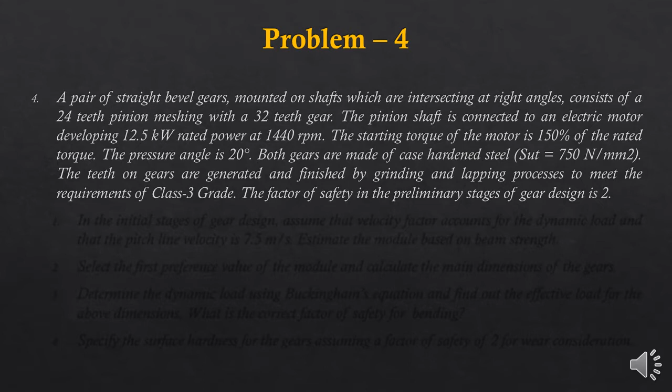In the initial stages of gear design, assume that the velocity factor accounts for the dynamic load and the pitch line velocity is 7.5 meters per second.

Estimate the module based on beam strength. Select the first preference value of the module and calculate the main dimensions of the gears. Determine the dynamic load using Buckingham's equation and find out the effective load for the above dimensions. What is the correct factor of safety for bending? Specify the surface hardness for the gears, assuming a factor of safety of 2 for wear consideration.

Alright, so this is the problem that we have now. If you note here, we had solved a similar problem for spur gears. More or less the same parameters were given, and they had asked us to design for the spur gear. This is similar, but here they have asked us to design a bevel gear. The application remains more or less the same.

Important point to note in the problem statement is the shafts are mounted at right angles, therefore theta is equal to 90 degrees. So most probably we'll be using a miter gear for this application. The gear teeth are known to us. Service factor is given as 1.5. Since we know ultimate strength, we can find out allowable static stress as ultimate strength divided by 3.

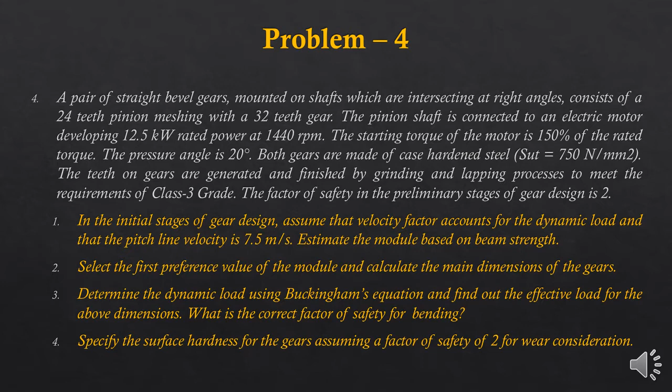Alright, so let's list the data and then get into the solution in the next slide. The data that we have is these, and we need to find module, gear dimensions, dynamic load, effective load, actual factor of safety, and Brinell hardness numbers.

All right, so in the slide I've already calculated the allowable static stress, ultimate tensile strength divided by 3, which is 250 Newton per millimeter square. So this has been done already. So let's look into the solution in the next slide.

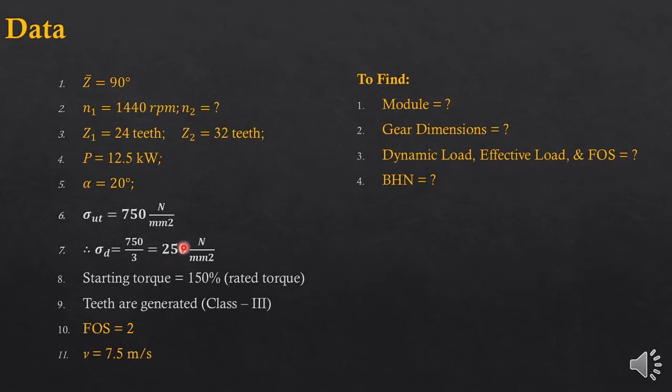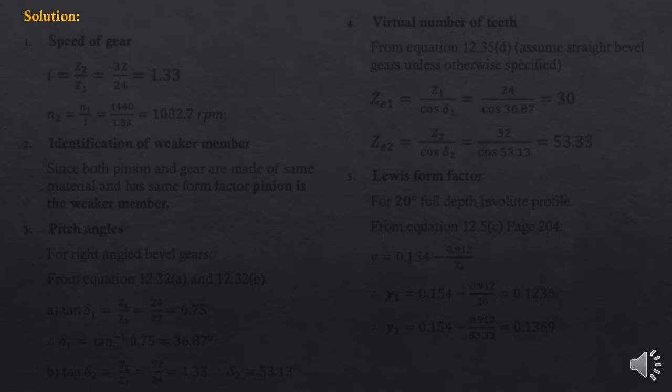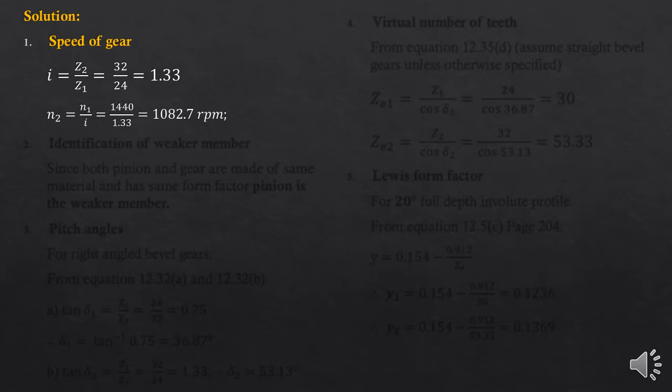Okay, so solution as usual begins with gear ratio to determine the unknown factors. We know both the number of teeth on pinion and gear, therefore we can calculate gear ratio as 1.33. Speed of the pinion is known, therefore we can calculate speed of the gear and we get it as 1082.7 RPM. Since both pinion and gear are made of the same material, we can tell that pinion is the weaker member, therefore design calculations are based on pinion.

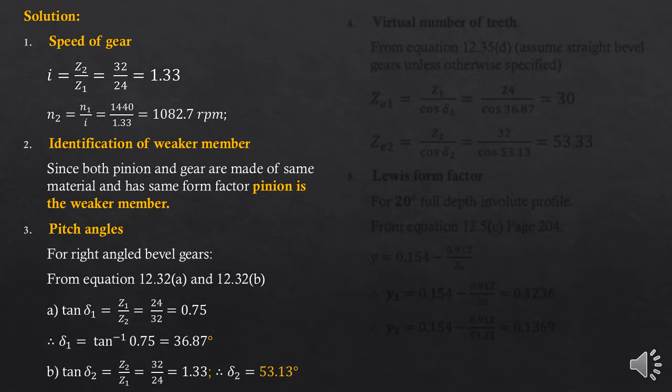Now for bevel gears, we will have to immediately calculate the pitch angles delta 1 and delta 2. Since the angle between shafts is 90 degrees, we take right angled bevel gears and calculate delta 1 as 36.87 and delta 2 as 53.13.

So pitch angles are obtained, and then we will calculate the formative number of teeth or virtual number of teeth using equation 12.35d, and we get the equivalent number of teeth as 30 for pinion, 53.33 for the gear. Now knowing these virtual number of teeth, we can calculate the Lewis form factor using equation 12.5c, and we get the Lewis form factors as 0.1236 and 0.1369.

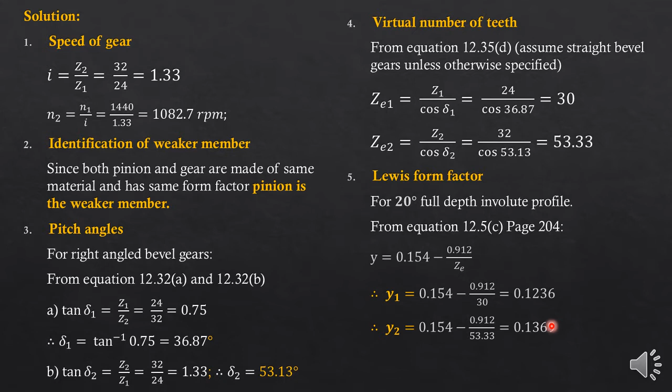Since we are designing for a pinion, we will be interested in y1, which is equal to 0.1236. This is the Lewis form factor. You'll have to multiply this by pi to obtain the form factor. Now we need to calculate module. Before that we will have to calculate the tangential tooth load, which we will see in the next slide.

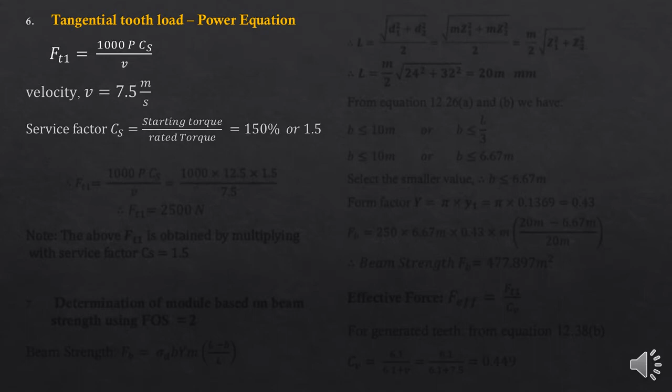Okay, let's calculate the tangential tooth load. Initially we will apply the power equation. The pitch line velocity is given as 7.5 meters per second, and the service factor is given as 150% of rated torque, which is equal to 1.5. Substitute it into the FT1 power equation and solve for tangential tooth load, and we get it as 2500 Newton. Take into account the fact that you have already multiplied it with 1.5.

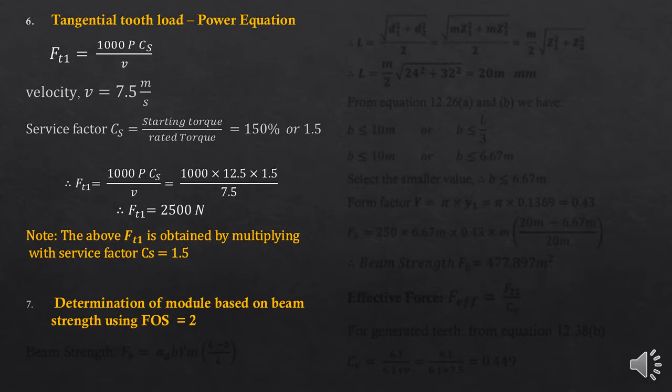But in this problem, if you read the problem statement, it is mentioned that we should calculate module using beam strength, and they have given us an initial factor of safety. Therefore the approach to calculate module is specified in the problem itself. We need to design or calculate module using beam strength value, using an initial factor of safety of 2. So let's do that now.

Beam strength can be obtained from the Lewis equation by taking out CV. Cone length you can calculate as d1 square plus d2 square by 2. Since we don't know d1 and d2, we can express it in terms of module, and we get cone length as 20 module.

Now if you look at the beam strength, we also need to know the face width b. From equation 12.26 a and b, we know that face width can be either 10 module or L by 3 module. Among these two we pick the smaller value. In this case, L by 3, that is 6.67 module, is smaller. Therefore we stick to face width equal to 6.67 module.

Now the form factor: you calculate pi into the Lewis form factor for the pinion, and we get it as 0.43. Now we know all the factors, substitute into the beam strength formula, and you get beam strength as 477.897 module square. So this is the beam strength formula here.

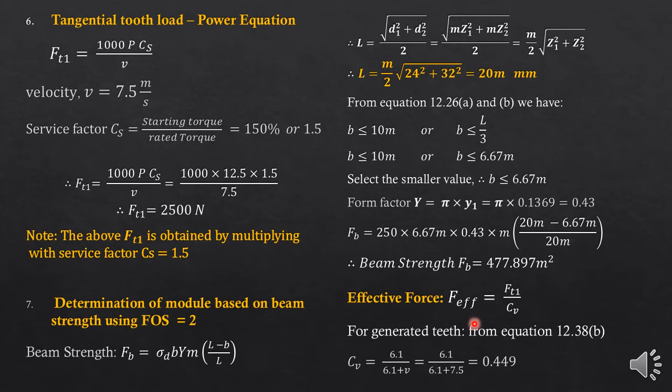Okay, so effective force can now be calculated. You know tangential tooth load as 2500, velocity factor is 0.449. You divide and you will get effective force. Once you know effective force, you can substitute this into the factor of safety formula, which we will see in the next slide.

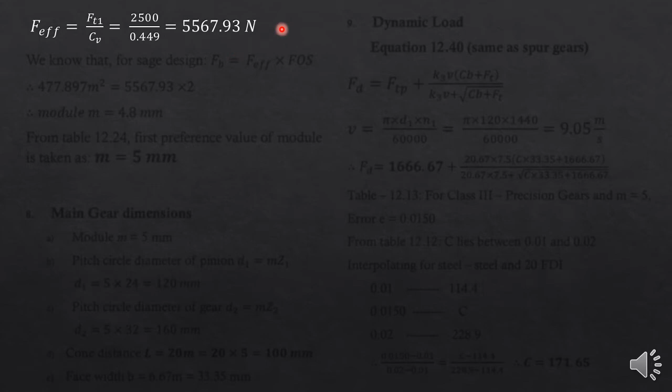So we know that effective load is tangential tooth load by CV. Therefore effective load turns out to be 5567.93 Newton. Now they have asked you to calculate module based on beam strength.

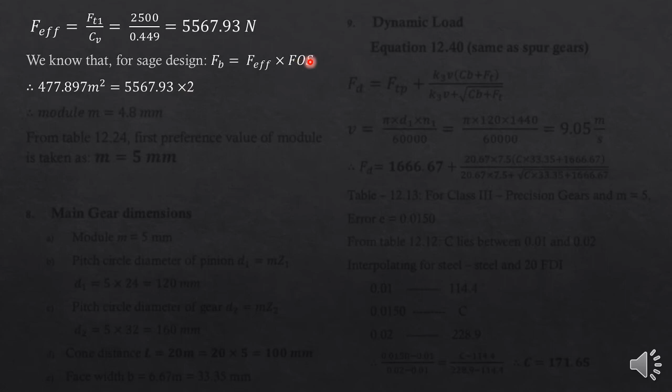For safe design we know that beam strength should be equal to effective force into factor of safety. Factor of safety is given as 2. Therefore you substitute: beam strength we have calculated as 477.897 module square, this is equal to effective force we have calculated as 5567.93, into factor of safety given in the problem as 2. Now this equation can be solved for module.

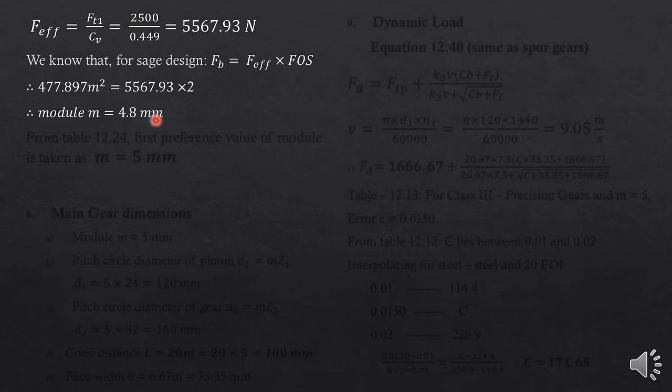Solving for module, you will get 4.8 mm. Now in the problem they have asked us to choose the first preference value, which is given in table 12.24, specific to bevel gears. You substitute that and from the table you will see that the closest first preference value is 5 mm. Therefore in this problem the module should be considered as 5 mm.

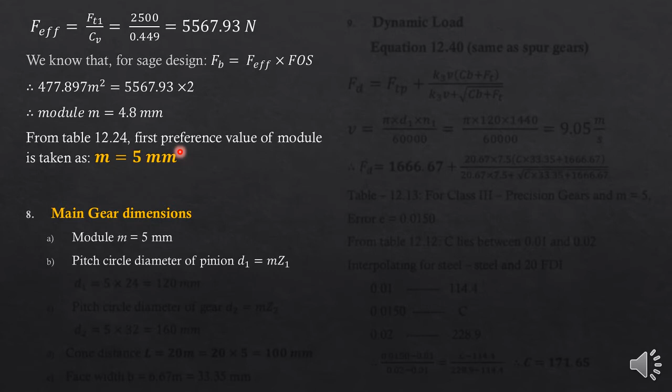Now the next thing they have asked us to determine is the main gear dimensions. Now that we know module is equal to 5 mm, you can calculate the pitch circle diameter of the pinion, since you know the number of teeth in the pinion as 24. You will get D1 as 120. Similarly, pitch circle diameter of the gear can be calculated as M times Z2, and it turns out to be 160 mm.

Cone distance, which we had calculated as 20 module, will now get an actual value of 100 mm. Face width, which was 6.67 module, will become 33.35 mm. So for the main gear, dimensions have been obtained.

Now what else have they asked us to find? They have asked us to calculate the dynamic load, then the effective load, and then determine the actual factor of safety. Let's begin with the dynamic load.

We know that for bevel gears, the dynamic load equation is the same as that of spur gears. But the velocity, which was initially taken as 7.5, will have to be refined now, because velocity is pi d n by 60, and the diameter value we just obtained as 120. Therefore a more accurate value of pitch line velocity can be calculated using D1 as 120, and you get linear velocity as 9.05 meters per second.

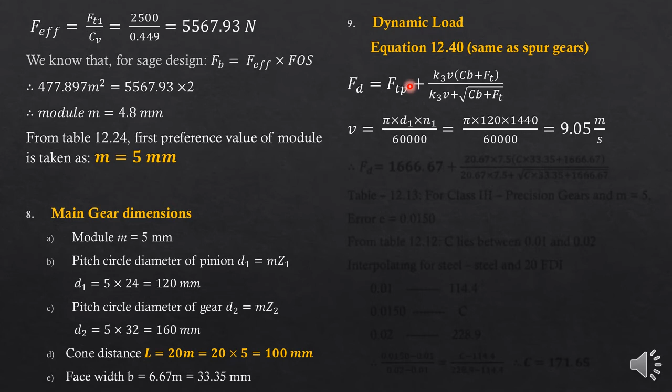Now for dynamic load, I will divide 2500 by the service factor CS, which is equal to 1.5. When I divide 2500 by 1.5, I get 1666.67. That is the value I will substitute here.

The only unknown now in the dynamic load equation is the dynamic factor C. You need to calculate this from table 12.13. From 12.13 you get the gear error for class 3 and module 5, which is 0.0150. From table 12.12, you see the required dynamic factor lies between 0.01 and 0.02. Interpolate it and get the dynamic factor as 171.65.

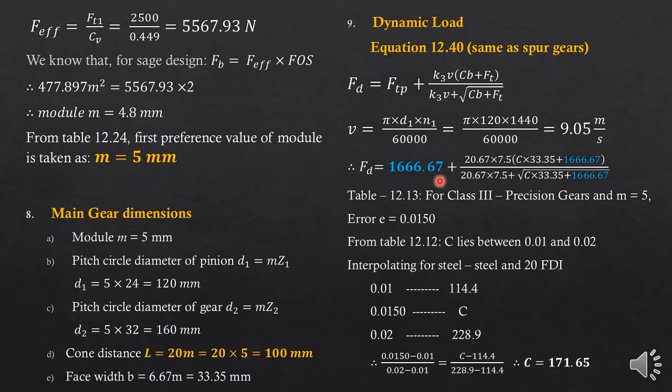Substitute C in the dynamic load formula and you will get the dynamic load, which we'll see in the next slide. Substituting all the factors, you get the dynamic load now as 6421.22 Newton. So dynamic load is obtained.

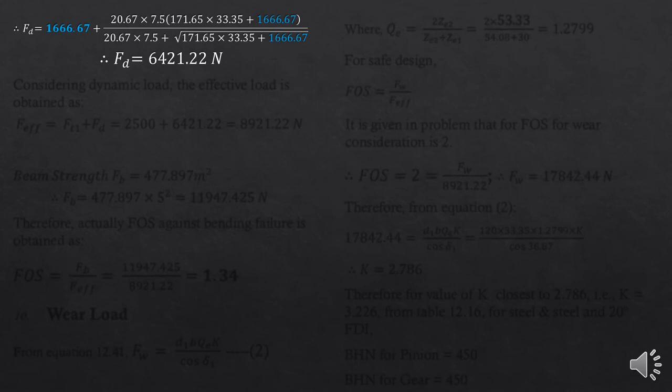Then they have asked you to calculate effective load, taking into account the dynamic load. So taking dynamic load into account, the effective load becomes tangential tooth load plus dynamic load, which turns out to be 8921.22 Newton. Now you have the effective load.

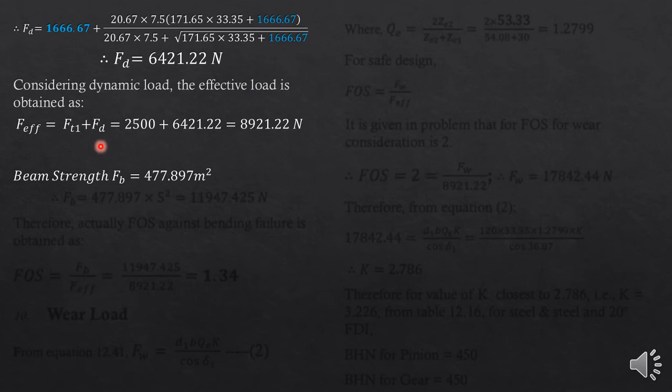Now they have asked us to calculate the actual factor of safety against bending failure. Therefore, beam strength, which we expressed as 477.897 module square — substitute module equal to 5, which we recently calculated, and you get the beam strength as 11,947.425 Newton.

Therefore the actual factor of safety against bending failure can now be obtained as bending strength divided by effective load: 11,947.425 divided by 8,921.22, which is 1.34. This is the actual factor of safety. Initial factor of safety was 2, but based on beam strength, we compute the actual factor of safety as 1.34.

The last part of the problem was to determine the surface hardness of pinion and gear. For that, the problem statement asks us to consider a factor of safety of 2 against wear failure.

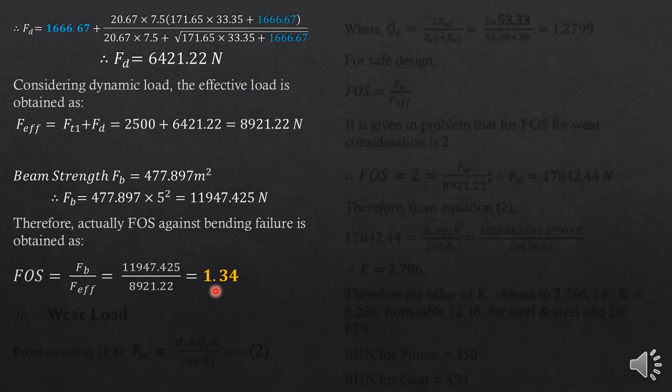As usual, we begin with the wear load equation for bevel gears given in equation 12.41. The ratio factor we calculate as 1.2799. Now for safe design, we know factor of safety equals wear load by effective force. They have asked us to consider a factor of safety of 2, so substitute that and calculate the wear load.

Wear load turns out to be 17,842.44 Newton. Now to obtain the Brinell hardness number, we need to know the value of K. We know wear load is equal to 17,842.44. Equate it with the wear load formula.

You know all the other factors but K, so you can solve for K. K turns out to be 2.786.

In table 12.16, the value of K closest to 2.786 is 3.226. For 3.226, you get the Brinell hardness numbers for steel pinion and steel gear at 20 degree pressure angle. You get BHN for pinion and BHN for gear as 450.

So this is how you design bevel gears for the application specified in solved problem number 4.